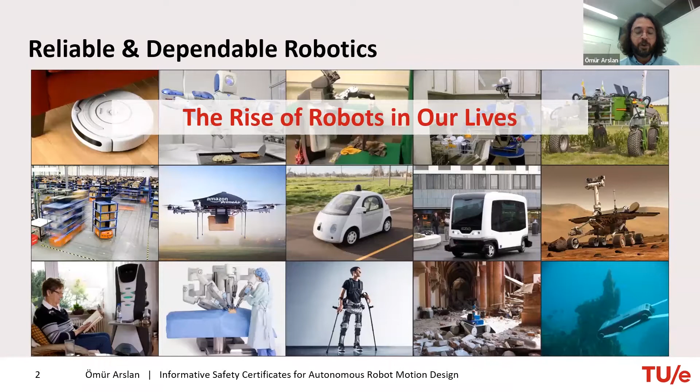But today it will be more like an intellectual discussion with fundamental questions about reliability and dependability in robotics. I believe I don't need to convince anyone here about how important robotics is and how they are getting more and more involved in our daily life, from autonomous mobility to household events, and especially maybe logistics settings, assistive robotics for the elderly. So I think what makes robotics that attractive, of course, some maybe financial business plans for the industry, but from my perspective, the one unique capability this technology provides, and no other technology was able to provide before...

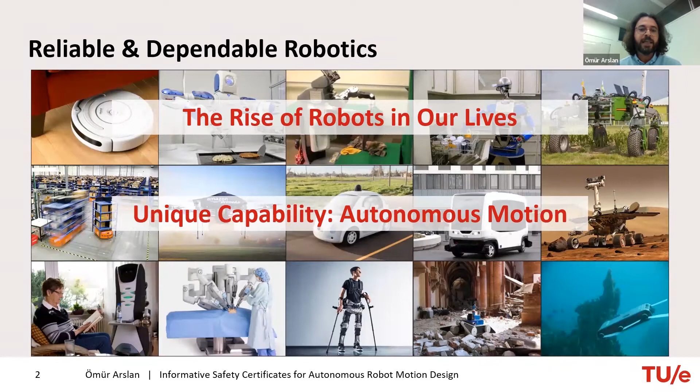...is autonomous motion. And of course, that comes with different challenges, because robotics was first applied in very structured industrial settings, and it was relatively easy to implement, with less concern about dependability. Now we are talking about robots that come from structured environments to unstructured settings, where they need to work around people, around other autonomous vehicles. And when you think about this problem, it's a little bit challenging, because when you just think about interacting with or designing autonomous motion around another autonomous device, especially if you don't know anything about how it perceives the environment or how it plans, it's a big challenge.

So it is completely different than a kind of centralized multi-agent system design approach. We need to be able to deal with all the ambiguities, uncertainties, and unknowns in the environment, in the behavior of both people and these autonomous systems.

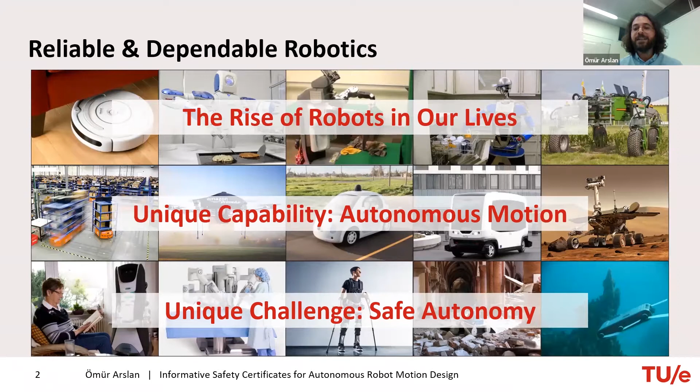And I think this autonomous motion comes with a unique challenge, and I'm very interested in that part: how we can ensure safe autonomy for such robotic systems so that we can reliably deploy them in practice around people, or when we send them on a mission to Mars, they should work as planned. So we should verify the expected motion. Of course, in the lab, we are not going to be able to do all of this.

Just to give you some idea what kind of infrastructure we have at TU Eindhoven, I'm mainly focused currently on mobile settings, small-scale vehicles with onboard perception and decision-making mechanisms. So they are scaled cars, maybe small mobile platforms like TurtleBots, and I use them for both research and education, because the other aspect of robotics, I believe, is that we can have all the hardware you want, all the sensors, but the work is done with people.

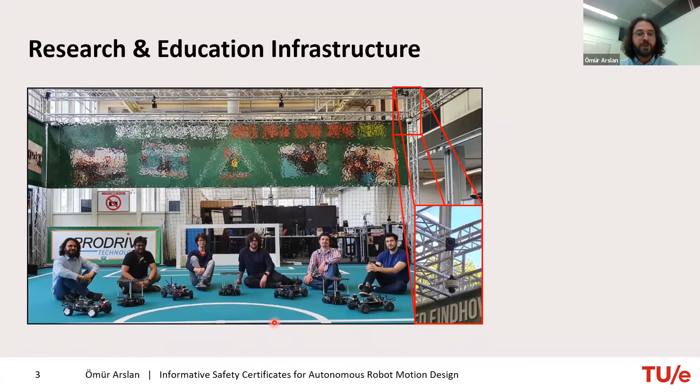Being in academia, I believe it's a privilege to help people grow as future engineers and roboticians who can contribute back to that literature. In addition to motion planning, I'm also very interested in mobile perception, because to really achieve true reliability and dependability in a robotic platform, you need to integrate both perception and motion together. I'm not looking to develop a new perception, localization, or mapping algorithm, but more interested in the quality of localization and mapping, so I can combine and reuse that information when designing a motion planning algorithm that can help perception.

When you are driving around, sometimes you need to slow down because your localization or visual odometry gets worse. If you can monitor the health of these perception algorithms, you can reuse this information in your motion design. I also look at different sources of information when designing such complex robot behavior.

Onboard perception is important, but I also think external perception, like a security camera in this figure, can monitor the motion of the robot and provide side information. This is very critical for traffic monitoring, because your car in autonomous driving mode approaching an intersection cannot see everything, but side information from security cameras and traffic lights can help increase the safety of the overall system.

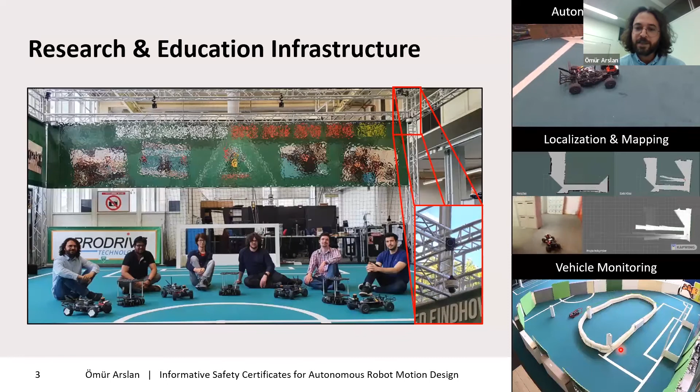But today's topic is safety certificates: how we can guarantee the safety of my robotic system. Especially, I think these elements are very critical for motion design.

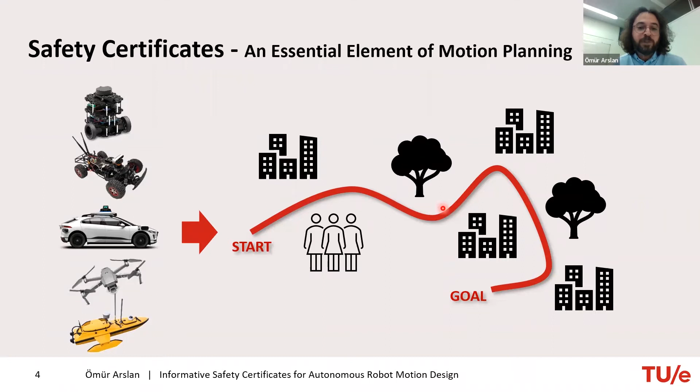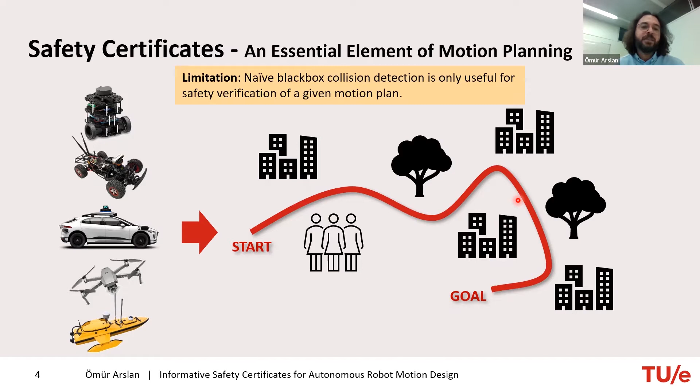When we think about safety, it can have different interpretations. Given a motion design, you can check if this motion is safe. From my perspective, this is not really a safety certificate for motion planning, but rather using the motion plan in a naive way — performing collision detection along the predetermined motion just to verify if the plan is safe. I'm more interested in how to design an informative safety certificate that will support the motion planning task itself.

It's not just about checking along the motion whether you always have a collision-free position. More than this, a safety certificate should relate back to the environment if possible. I'll give examples during the talk of how it can be done better than just collision detection. It should also relate back to the equation of motion of the robot itself, and to whatever trajectory representation you use to design closed-loop motion — a safety certificate should relate back to that trajectory representation if possible.

To give you a toy example of generating such a trajectory: a common, standard approach is to look at safety corridors along the environment.

So it's built based on the environment information, completely ignoring what kind of platform you are designing your motion for. And then you can try to optimize a trajectory along these corridors, because you know that it's safe, and you can find your solution. But the problem is it's lacking the information about the robot itself at the beginning.

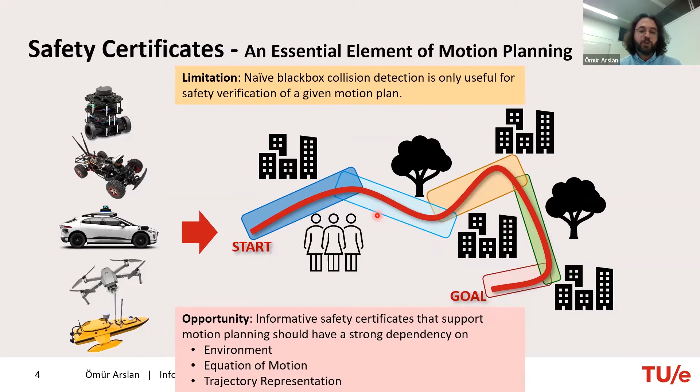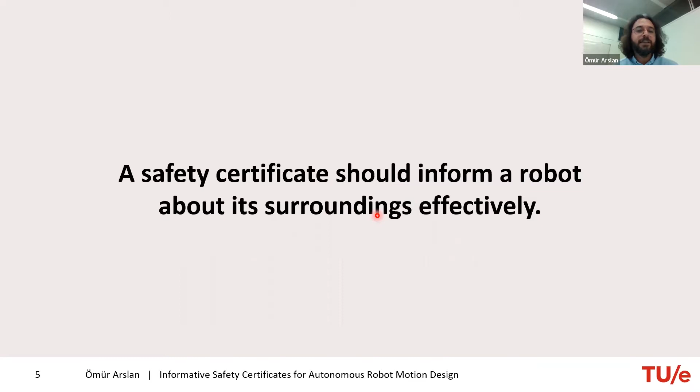So from my perspective, one of the first things when I look at a safety certificate is it should inform the robot about its environment and surroundings as effectively as possible. I think it's maybe very intuitive, very obvious. All of us think that yes, this should be there. But when it comes to applying such a safety certificate or finding one, unfortunately we don't have much of such tools available yet. There are some new tools, but when we look at the classical way of collision checking, they are very primitive when it comes to informing the robot about the environment.

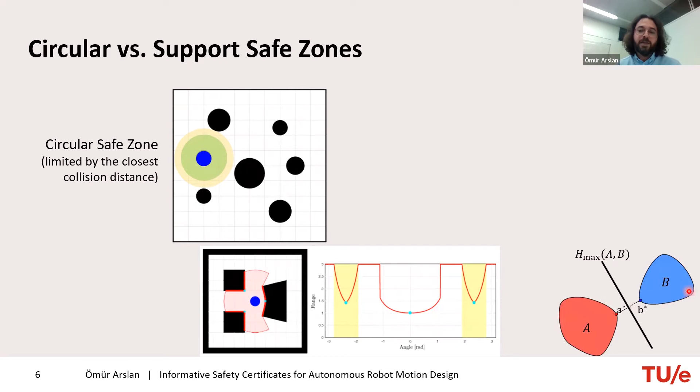What I suggest is, maybe between the robot body and the obstacle, use a separating hyperplane like in the support vector machine, so that you can construct an asymmetric and safe region around the robot. I call them support safe zones, like support vector machines, because this region, the yellow one, is actually linearly separated from the obstacles based on this supporting vector field, the supporting vectors. These are linearly separated between the yellow region and the critical collision points you see in this range data. I think this is a nice capture of the local geometry.

It's not as detailed as the red region you see here. The other problem with the red region is it's non-convex, so there can be other artifacts about this non-convexity, but it shares this convexity property with the circular one. Compared to the circular safe zone, it captures the local geometry up to a certain level, not as detailed as the red region.

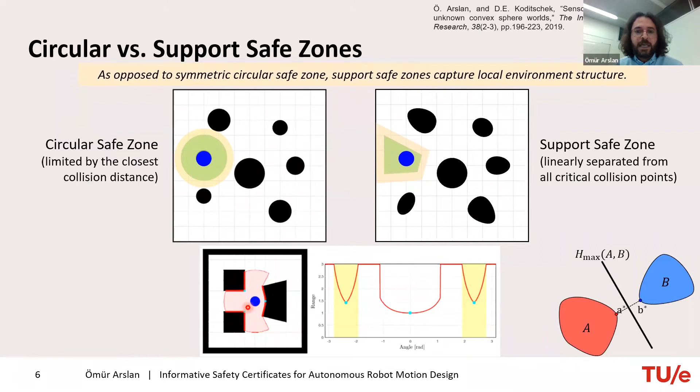Can we use such a construction for safe navigation? Using a simple idea: you have this safe zone around your robot, you have a destination to go, you can pick the closest point and continuously move towards that, expecting you will eventually reach the destination. It's like chasing a carrot on a stick.

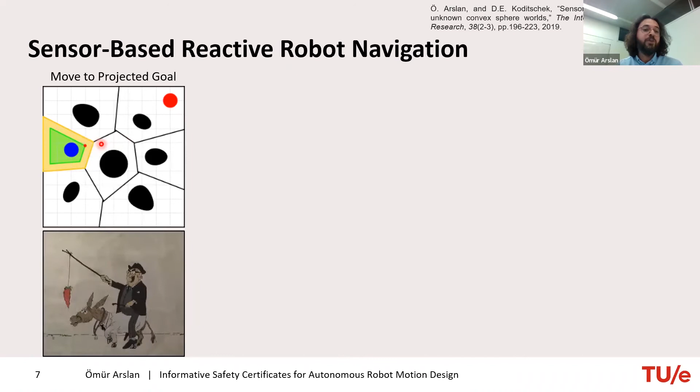When you move, the location of the local goal changes based on where you are in the environment. So the way you encode the safety now supports the motion planning, and it also reflects the environmental property when you are making a decision.

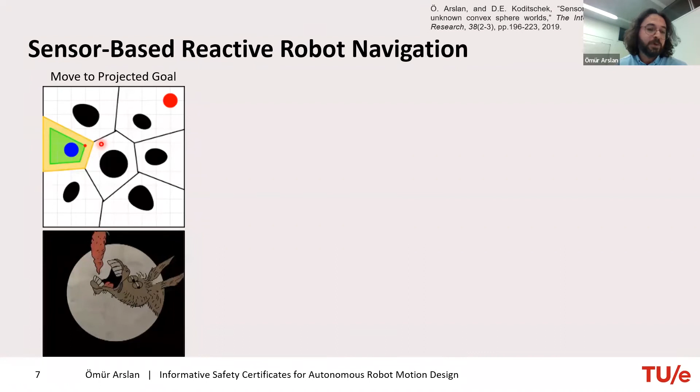When we apply this to a robot platform, like a differential drive, you see that it can detect local obstacles using the laser scanner, use these critical collision points, which are the local minima in the range data, construct these local safe zones, and reactively reach the destination.

Why do I call them reactive? Because actually we didn't plan any path. We just construct a nice vector field, a feedback policy to reach the goal. So if I took the goal and start moving around, it will just change its behavior reactively. That is a very simple combination of sensory information with action.

The way of defining how we can encode the collisions helps us with motion planning. If you apply the same procedure with a circular safe zone, you cannot get much out of this kind of policy—it will get stuck at these undesired local minima.

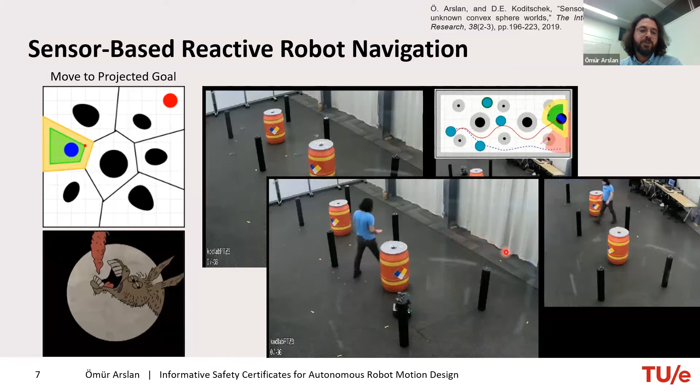So this was one demonstration of why an informative safety certificate may play a critical role in autonomous motion design. Of course, you are not only limited to such a relatively simple environment—you can apply the same idea with probabilistic motion planning.

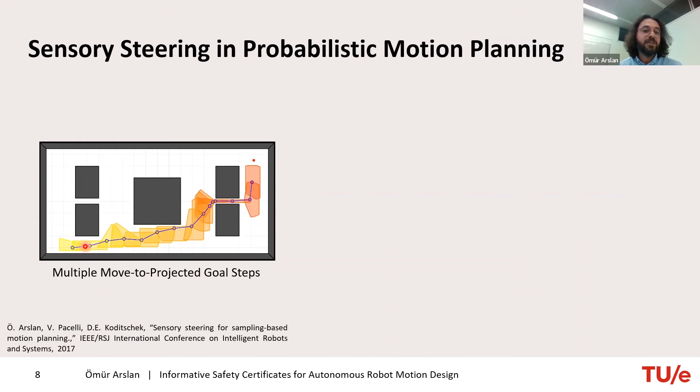Instead of straight line steering, which is the very basic approach in probabilistic motion planning—where you have a sampled start and goal configuration and try to combine them through a straight line—what we suggested is we can use these local support zones and have a sensory steering primitive that will adjust the steering direction and step size on the fly, adaptively.

All of a sudden, what you obtain is, when you apply a PRM-like probabilistic road map, you increase the connectivity of your network. On the top right figure, you see a PRM with straight line steering. We just change how the local connectivity is defined—instead of straight line steering, we use this policy, and the connectivity increases significantly.

One of the promises of this method is you can plan very effectively around narrow passages. This is a known problem with probabilistic motion planning, because you need to effectively sample around these narrow passages, or find a way of informing your steering mechanism around them. I believe this is really about encoding the collisions in a proper way so you can capture the local geometry and use that back for motion planning, not only for safety verification.

Here on the top, you see that the algorithm doesn't perform well because it was basically using straight line steering, and the collision checking is like yes or no—it doesn't use any geometric information about the local structure of the configuration space.

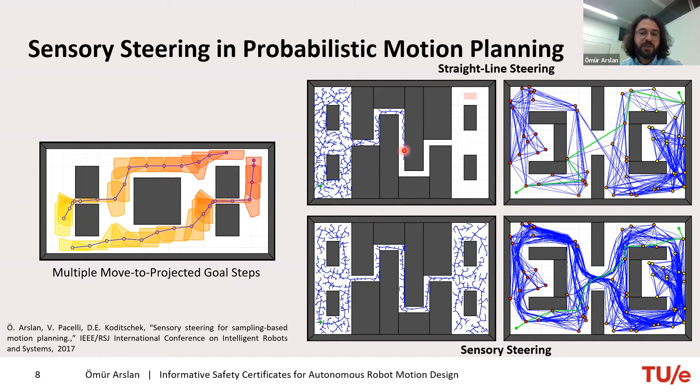Another example, to highlight why we need to put these separating hyperplanes in a balanced way between the obstacle and the robot body, becomes clearer with a multi-robot configuration. You can apply the same procedure—you may have multiple robots with different sizes, and apply the separating hyperplane between them to obtain a safe zone for each robot.

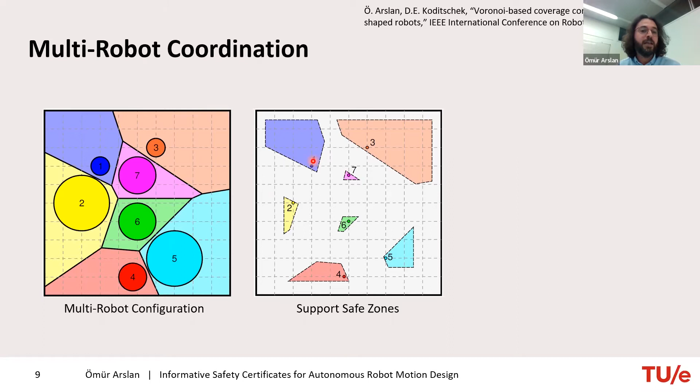Whatever problem you are solving, you can try to solve it over these relatively available regions. Some robots will have more room to change their position and create aggressive motion, while others might have a very small domain to change their configuration.

We applied these ideas to coverage control in a multi-robot setting, and observed that sometimes, for example, some sensors might become redundant—they're not participating in coverage anymore, but we can still work with them by just moving them to the center of their safe zone, since it's a kind of balanced strategy.

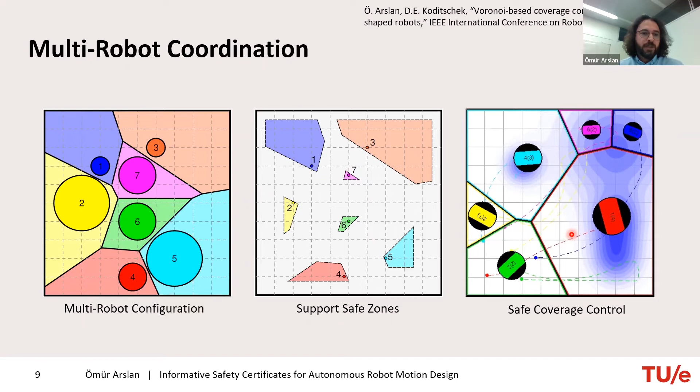And at the end, this also helped them find an open region to cover and become active in the coverage. So it was an unexpected behavior emerging from this: if the safety is very aligned with the environmental information, in this case the interaction between the robot, it might help the control and planning. So this was the first part of the talk.

Now we switch to another perspective. When I think about the safety certificate, the other thing I expect from this tool is it should be aligned with the robot motion itself, because I'm designing a safety certificate for the robot's motion, not its body shape or other things. The robot won't be stationary, it will be moving, so it should take into account the motion itself. This can be obvious, but when we look at the literature, we are not there yet to have a very promising safety certificate effectively taking robot motion into account.

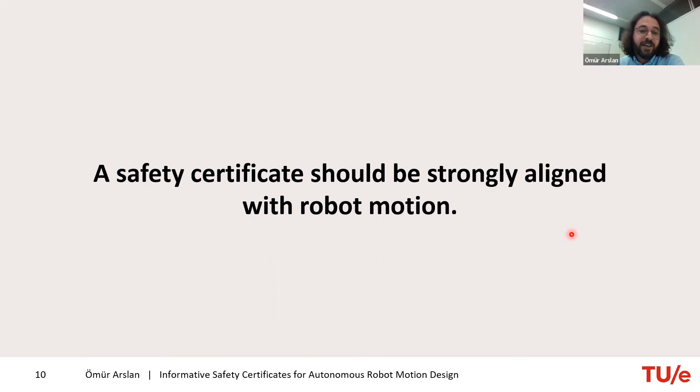What does that mean? When we look at planning based on control, we usually use set invariance methods like the Lyapunov method. They try to use system energy or a form of potential function to avoid collision. From my perspective, these tools are not designed for encoding collision; they were designed for proving stability. Maybe 30 years ago, in 1986, when potential fields were first applied for robotics obstacle avoidance, they were promising. But now we need to look from a different perspective.

For me, invariance - to be or not to be - is a fundamental question right now. To give an example, I currently look at some fully actuated systems with proportional higher order derivative control. To make it more concrete, maybe for you, PD control. So you have a force control system controlled based on the position and velocity error with proportional control feedback.

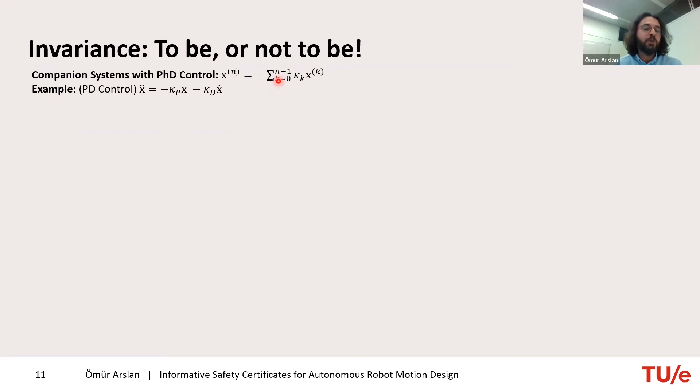You can think about extending this to higher order systems, because when you want to apply this to non-holonomic systems, dynamic feedback linearization becomes promising, and it usually yields such closed loop system behavior, or differential flatness for a drone. So at the end, a drone's motion becomes smooth enough dynamical system behavior instead of considering non-holonomic constraints from the very beginning. So when we look at such a system stable around the origin, the Lyapunov ellipsoid describes the future motion very well, so there is no problem there.

They capture really how the system will behave in the future, as seen in this animation once again. But the problem with these methods is, in the right figure, you see different initial conditions - position and velocities - and the common thing is they all share the same Lyapunov level set. So whatever initial condition you pick, the motion prediction is the same, but the motion is completely different visibly.

One reason we like Lyapunov-like methods is they easily generalize to higher order systems, sometimes non-holonomic systems. That is the reason why we like it. But at the end, for very different initial conditions, it captures the motion in one way or another. From my perspective, it is not accurate enough, it's not descriptive enough.

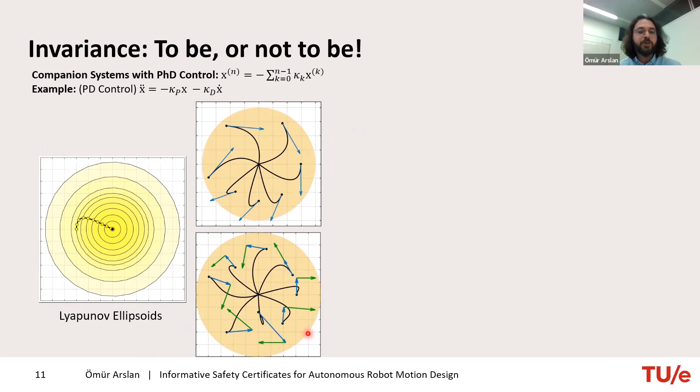Recently we developed some new tools like Vandermonde simplexes. They're able to capture the robot motion very accurately, strongly depending on the robot's initial state, not just the energy of the system. For the same initial condition on the left, we can capture the expected robot motion much more accurately, and a closed form solution is available.

That is another attractive property of these Vandermonde simplexes. It's very intuitive: at the end, the motion is described with respect to the origin by your goal, your current position x0, and an offset from x0 with your velocity. If you go to a higher order system, the result generalizes, and you see acceleration becomes important in deciding the motion, and you can go even to higher order derivatives. Compared to the Lyapunov invariant set methods like the Lyapunov ellipsoid, we are able to capture the robot motion much more accurately.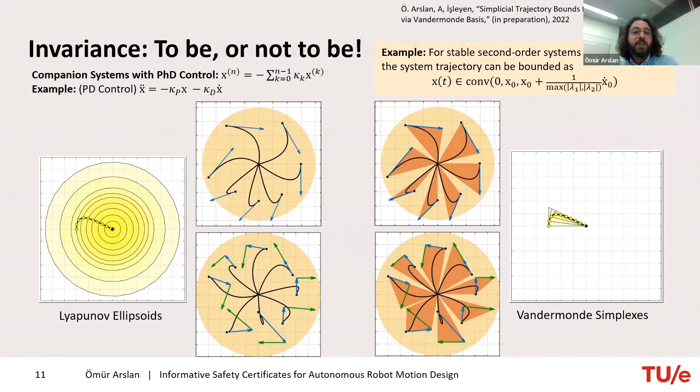I believe that is very fundamental in robot motion design, because we apply this in feedback motion planning. We combine motion prediction with planning in a closed loop system, and my approach in this kind of setting is to benefit from the available planning algorithms.

So you can ignore the robot dynamics. You can assume a position or velocity field, velocity controlled robot, and design a high level planner based on A star or sampling based methods. The question is, these plans are usually not time parameterized. They tell how to go from start to goal, and you need to apply this to the higher order system you have.

Stabilizing your system around the set point is also a relatively well established thing for many existing robotic platforms. To make this link between them, we use the reference governors as a planning control interface. Basically, it takes the reference plan and puts dynamical information, some time parameterization, on this based on the expected robot motion with respect to this governed plan.

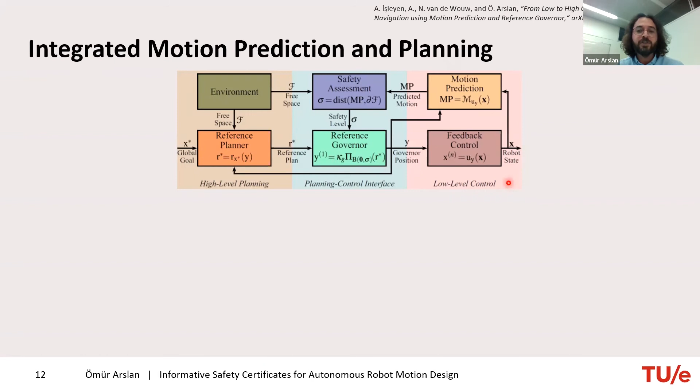We use this motion prediction, like maybe a Lyapunov-based motion range estimation or the Vandermonde simplexes, and we can encode the collision not just based on what is my current position, but what is the expected motion's distance to collision. The safety level is reused in the reference governor to tell how fast you need to follow this reference plan. This introduces a kind of nice bidirectional interface between the high level planning and the low level control, so that you don't need to replan. You can make sure that your actual system can realize the plan as accurately as possible.

And here I want to show an example of this. Before that, I need to just introduce a couple of things to understand these plots much more easily.

So we have a reference plan, it is the red piecewise line here. And we create another vector field around this. You can consider that this is the velocity field for our governor system. The governor is denoted by this green. It is nothing but a virtual robot platform, just velocity control, so that I can apply this reference plan directly on it.

Depending on the different time parameterization, based on how well my actual system, blue, can really track this governor in a safe way, I will use the yellow motion range prediction to check my safety, and if it is far away from the obstacles, I will let the green one go faster.

At the end, different motion predictions yield different motion patterns. What we observe is, if you have a better motion prediction, of course the robot will go faster to the destination. Again, the problem with the invariance approach is they are too conservative. They are not able to encode the collision in a proper way, so they try to use the equation of motion, but not really in a descriptive way.

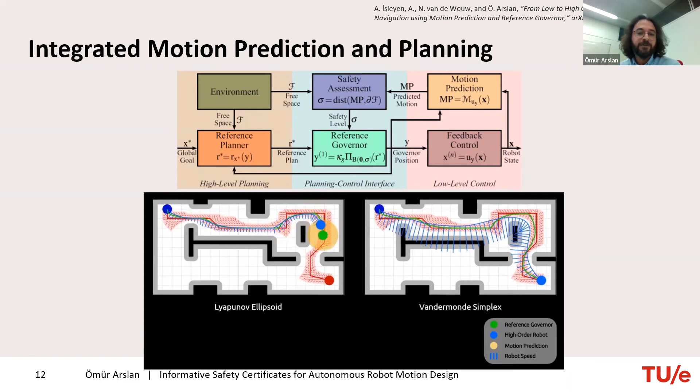Another important expectation from a safety certificate, because at the end we are going to apply these methods on a real platform, and we usually have that trade-off between accuracy and efficiency. From my expectation, a safety certificate should allow us a systematic way of really trading off between the accuracy and the efficiency, instead of having a kind of trial and error based construction.

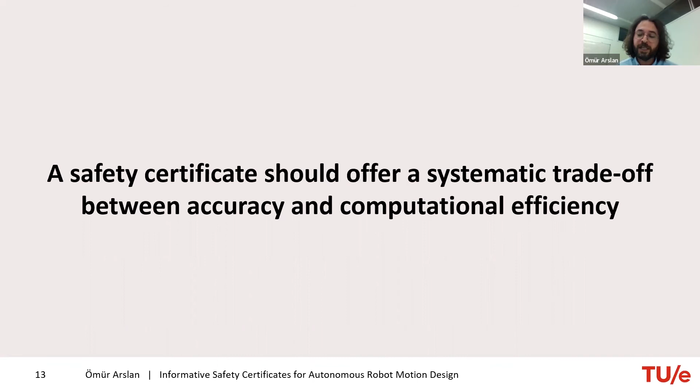And what I mean by this, I guess an example can be very useful. We will switch from the dynamical system to Bezier curves. These are very common polynomial curves used for trajectory representation, especially for drones. One nice thing about the Bezier curve is you have certain control points to describe a Bezier curve, and they use certain weighting known as the Bernstein polynomials. One nice thing about them is they're all positive and they sum to 1 at the end.

What you observe is this Bezier curve is nothing but a trajectory bounded by the convex hull of these control points. A very standard approach for checking safety is you just check if the bounding trajectory has an intersection with an obstacle or not, because your robot eventually needs to perform a motion like described by a Bezier curve. But checking the collision along the entire Bezier curve can be computationally hard, so instead you can check the motion range estimated by this convex hull and verify the safety.

A completely different way of checking safety of a system: from my perspective, if your system can realize this trajectory, it's very aligned with the motion. So it satisfies the previous requirement.

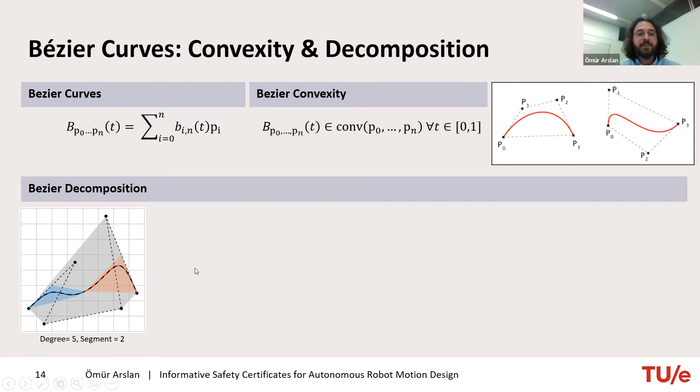Another nice thing about the Bezier curve is you can do systematic decomposition of these Bezier curves. So you can cut the curve into two, and all of a sudden you have two other Bezier curves, and the control points shrink. That is a property of the Bezier curve.

You end up with tighter convex bounds on the expected robot motion. You can increase the segment number, 3, 4, and get better and better motion prediction. After some time, you're able to capture the motion itself with these smaller convex regions, because each segment becomes almost a line. And for a line, the convex hull of the corresponding Bezier curve will be itself.

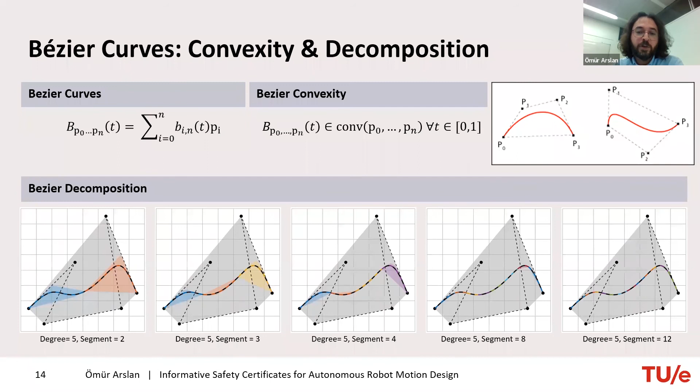The fundamental question is: how many Bezier segments do we need in order to end up with such an accurate motion representation? What should be the proper number of decompositions so that I can accurately check the safety of my system? Maybe there's sometimes a trade-off between accuracy and efficiency, because of the computational constraint, the real-time computational constraint. Maybe you're not allowed to go up to that level, and you need to stop in the middle.

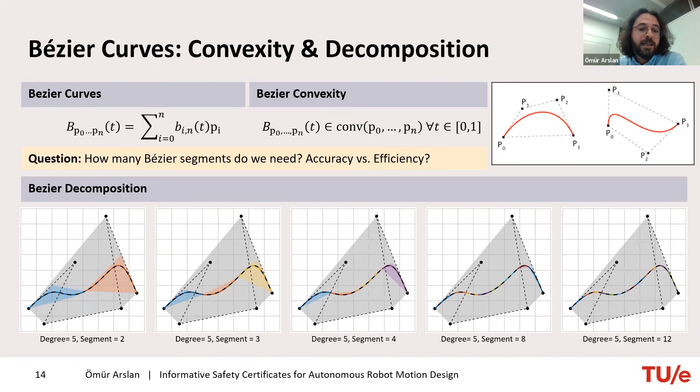We recently looked at these kinds of questions, because when I look at the literature, the answer to that question is usually given based on trial and error. People just pick 10, they see it doesn't work for the specific Bezier curve they have, and then they increase or decrease to find a better selection of how many segments they need.

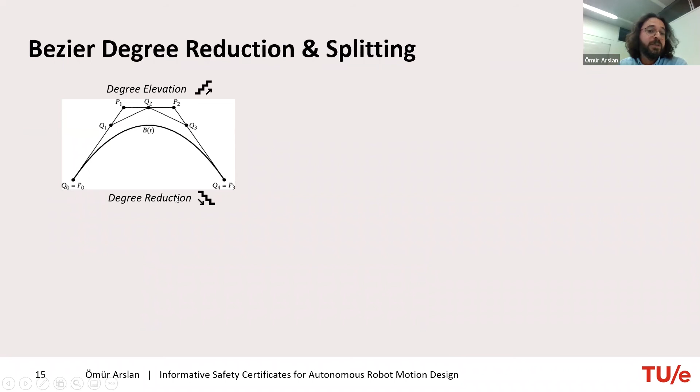Recently we looked at a completely different perspective, because one nice thing about the Bezier curve is we can do systematic degree elevation. You can represent exactly the same Bezier curve with more control points, or you can also do degree reduction. The picture with degree reduction isn't as accurate, because if you want to represent a 5th-order Bezier curve with a quadratic, there will be some approximation error, and it all depends on how you do the approximation.

So least squares approach offers a better solution. Overall, for such a Bezier curve, a linear segment will be a good least squares approximation if you go with a quadratic model. The issue, from my perspective, is the approximation doesn't capture the motion that accurately. For example, we often cannot give up these endpoint requirements—whenever I start the motion, I need to start at a particular point and finish at a particular position. But least squares tries to make sure there's a good balance of error during the entire trajectory profile.

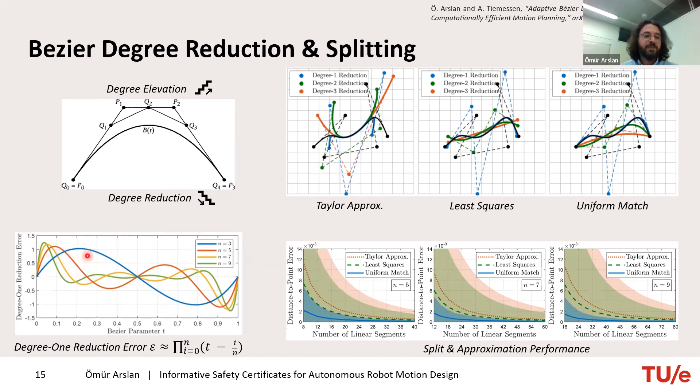It turns out that for an nth order Bezier curve, we have n-1 critical points, maximas and minimas. When you want to approximate a Bezier curve with a lower order Bezier segment, you need to pay attention to this error and how well you can approximate it. It structurally suggests that you need at least n-1 quadratic Bezier curves to match these maxima and minimas, and because of the asymmetry, you need to have more.

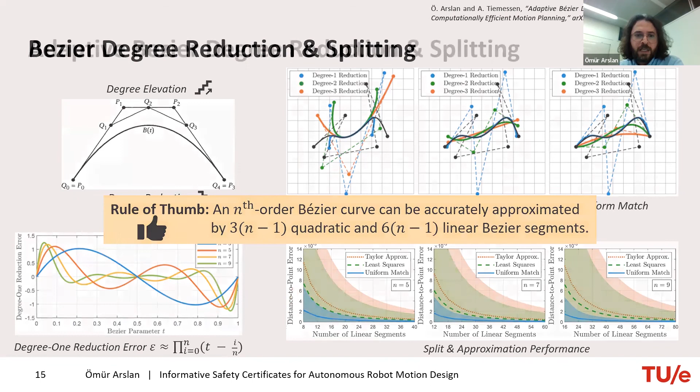As a result, we come up with this rule of thumb: if you want to accurately approximate a Bezier curve with quadratic or linear Bezier segments, you need 3 times n-1 quadratic segments, and 6 times n-1 linear Bezier segments. What this ensures, in these plots, is that in the middle case, independent of the degree of the Bezier curve, you get about 10 to the -3 approximation error, which is usually an acceptable accuracy for how well our distance-to-collision prediction should be.

So, of course, you can do it in different ways as well. You don't need to fix the number of segments always—sometimes it's needed for systematic optimization. But if you want to do it in an adaptive way, Bezier curves also come with another nice property.

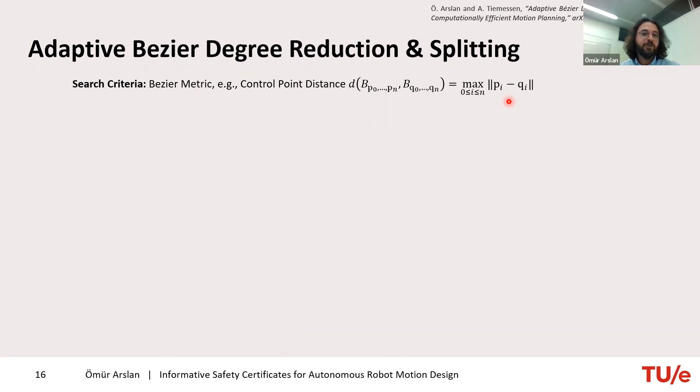You can compute the distance between Bezier curves analytically using different ways. For example, one is you can just use the maximum of corresponding control points. This gives us a systematic way of doing a linear or binary search. You can say you want to apply a binary search, and make sure that the distance between the actual Bezier curve and the approximation will be less than a certain threshold, and automatically it gives us how many different partitions you need to have.

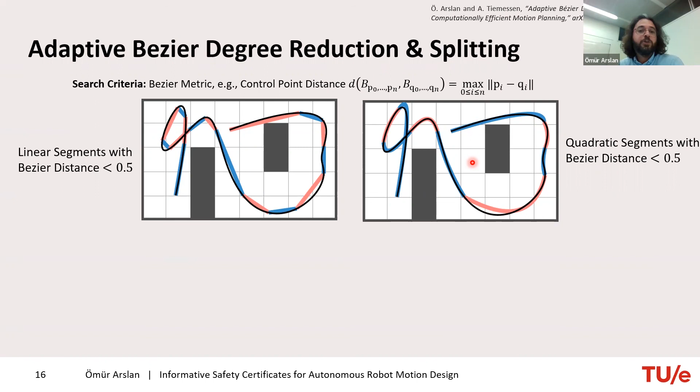Between linear segments and quadratic segments, there is a difference, because quadratic segments are more descriptive in describing the local motion, and at the end you get fewer such Bezier segments—something that can be needed to compensate for computational constraints.

And if you want to get better accuracy, you now have a knob: you can adjust the desired Bezier approximation error and get different resolutions of these segments.

So the overall story of this discussion about the Bezier curve is that they are very effective in terms of motion representation. The convex hull property is very relevant for safety verification, and you can systematically decompose them and verify the collisions at the accuracy level you desire.

So this brings me to the conclusion for today's talk. From my perspective, there's still an open challenge: we don't have an informative safety certificate that does all of the three requirements I mentioned—being able to capture the local environment geometry as effectively as possible, maybe alone, but not with others, like being strongly aligned with the robot motion, or systematically offering a trade-off between accuracy and efficiency. I think this is a fundamental challenge. If we can come up with such a safety certificate, motion planning will become much easier and much more effective.

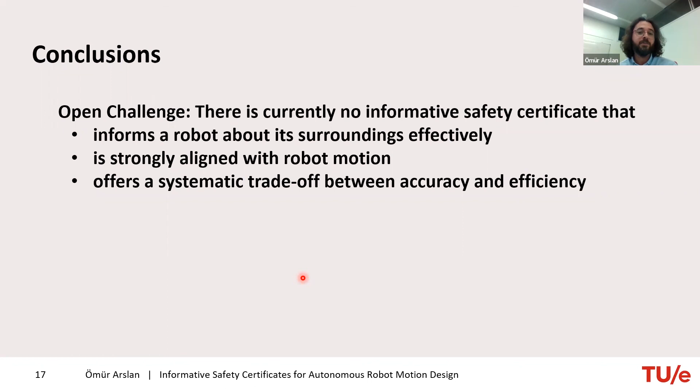And of course, the other things are, we have usual non-holonomic system constraints, so a safety certificate aligned with this motion constraint will be more than welcome. Handling uncertainty is a crucial thing, because we have state estimation uncertainty, perception uncertainty, and safety should be able to handle this kind of uncertainty properly in the risk assessment.

And finally, when I think about reliable robot motion design, it should combine motion and perception, and the safety certificate used in such motion design should also couple robot motion and perception in a systematic way. So with this, I will finish my presentation, and if you have any questions, you are very welcome to share your opinion and your questions.